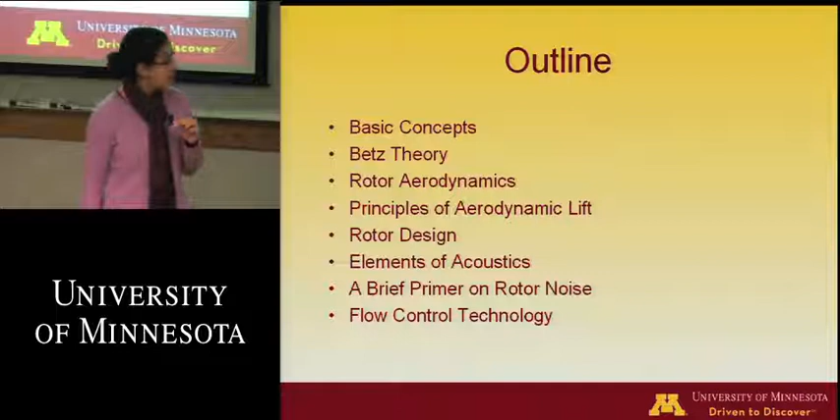Today we have with us Professor Arndt. He started his career in industry, first in rocket propulsion and then in the high-speed marine vehicle field. Since 1967, he's been in academia. Dr. Arndt's major research interests are in fluid mechanics, with emphasis on turbulent shear flows, cavitation, aeroacoustics including jet noise and turbo machinery noise, alternate energy with an emphasis on hydropower and wind energy technology, and aeration technology with a view towards developing cost-effective environmental techniques. He continues his research at the St. Anthony Falls Lab currently, with the University of Minnesota, where he's working on wind-turbine aerodynamics and supercavitation. He's a life fellow of ASME, fellow of the American Physical Society, and associate fellow of AIAA. So we welcome Professor Arndt.

Thank you. Oh, okay. I guess I got to use this thing, huh?

Okay, well, happy to see some people come here on this crummy afternoon.

First thing I'd like to ask is, do you have a background? Does anybody have a background in fluid mechanics? Okay, so with that in mind, I'll try to go easy on you.

What I want to do today is just kind of give you a feel for wind turbine technology and talk a little bit about basic concepts. We'll talk about some very early theory, which started in 1919. We'll talk about rotor aerodynamics, and since you don't have a background in fluid mechanics, we'll try to lead you through it as painlessly as possible. We'll talk about rotor design — obviously in 2 hours you're not going to become rotor designers, but just to give you a flavor for what's involved. And we'll talk a little bit about acoustics and rotor noise, and then a little bit about flow control technology.

So with that, we'll start with the first slide. Is this going in and out? Can you hear me okay?

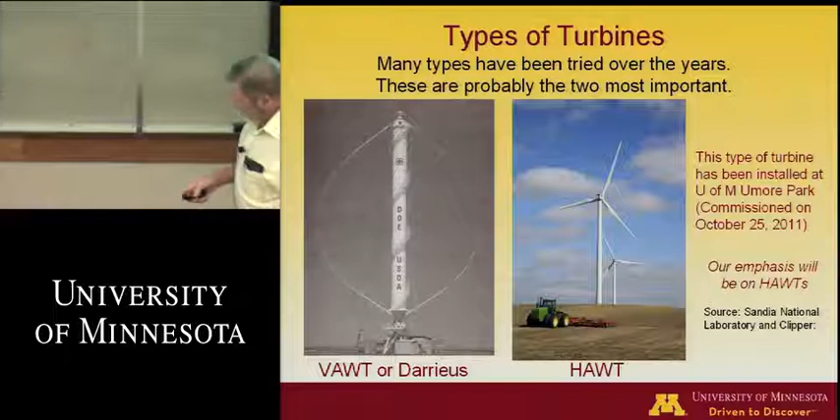First thing I want to point out is there are actually two types of turbines, the vertical axis turbine and the horizontal axis turbine. Our emphasis is going to be on the horizontal wind turbines.

I don't know if you read in the paper, there was a gentleman with a house on Lake Minnetonka, a very high-buck area, who decided to erect one of these. There's a huge stink in court about that. But I point that out because these vertical axis units show a lot of benefit for being in closed areas — they could be put on top of an apartment building and so forth. The horizontal axis units are more prone towards large utilities, and so they're very expensive.

For example, you visited the one at UMore Park, and the cost of that was somewhere between $5 and $6 million. So when we got the DOE grant, the good news was we got an $8 million grant. The bad news was that $5 to $6 million of that was going to go to build the turbine, so there was only $2 to $3 million left for doing research.

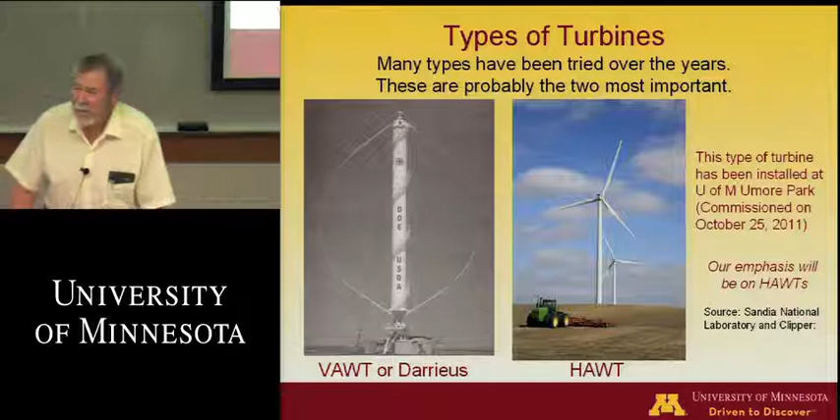So let's look at what we can expect out of a wind turbine. The first thing we want to look at is the power per unit area. This is simply one-half times the density times the velocity cubed — that's the power per unit area that the wind has. Now if we multiply that power per unit area by the swept area of the rotor, pi r squared, that ought to give us the kind of power we could expect.

So we'll define a coefficient of power, which is simply the power we get out, normalized with respect to this expectation. Okay, who wants to take a guess at how much we really can get? How many people say better than 90%? How many people say better than 80%?

70%? 60%? Boy, you guys are pessimists. Okay, let's look at what we can really achieve.

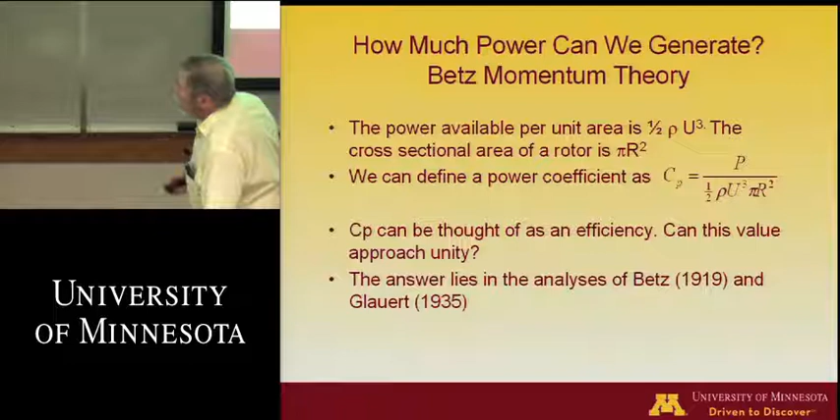It turns out that the low number we're going to see isn't because of any defect in the blades and so forth, but it's just the way the wind turbine operates. As I said, the answer to these questions was first developed by Betz in 1919, and then a person named Glauert improved that result.

The first thing we can look at is calculating the thrust on that rotor. We have an upstream pressure P1 and a downstream pressure P2, and we multiply that difference in pressure by a cross-sectional area, which in this case is that pi r squared. We get a simple equation: the thrust is equal to the product of density, cross-sectional area, the velocity v here, and the difference between the velocity upstream and the velocity downstream.

Okay, so that gives us one equation, but we have some unknowns because we don't know what v and u2 are. So what we'll do is write a Bernoulli equation.

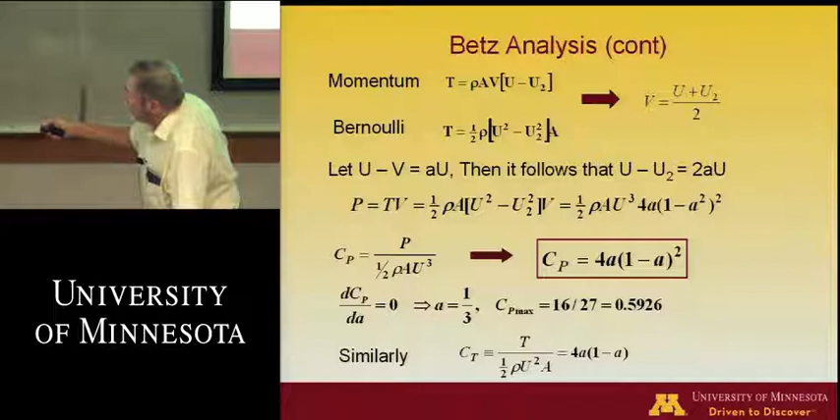We'll use this later, but we can also calculate the thrust coefficient simply as the thrust divided by 1/2 rho U squared times A, which equals 4A times 1 minus A. We'll use that formula a bit later.

Let's just use linear momentum. On that basis, he calculated that the maximum possible power coefficient would be a little under 6/10. But it took quite a while—1919 to 1935.

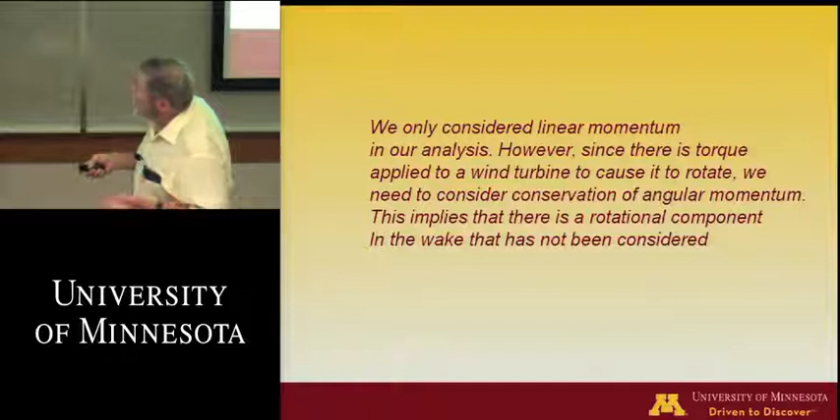So 16 years later, Glauert came along and said you still have another tool in your toolkit: you can conserve linear momentum, but since this thing is turning and there's a torque involved, you can also use conservation of angular momentum. This gives us another equation. It implies that if a rotor is turning, there has to be an equal and opposite rotational component to conserve angular momentum, as shown here.

Glauert used that piece of information—I won't go into the gory details—but what he found was that the upper limit Betz had calculated needs to be modified. We only get that maximum Betz limit when the tip speed ratio is quite large. When the tip speed ratio is low, you don't even get the 6/10.

Now this tip speed ratio is pretty important. If you were a designer wanting a lot of bang for your buck, what would you do with tip speed ratio in your design? Make it high. There are limitations on how high, but let's take a simple example.

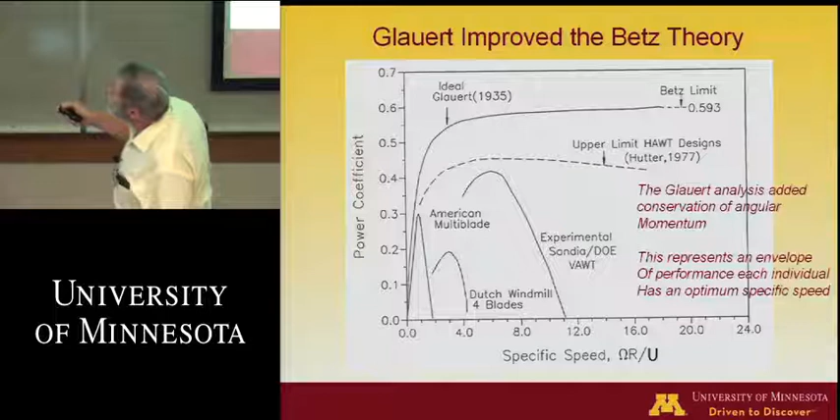So, how should we get that energy out of the wind? Should we just use drag? If you blow on something, you can make it move. Or should we use lift?

And we have the wind relative to the paddle is equal to the velocity u minus the tip speed, which is omega r. So the paddle is trying to move away from the wind, and so the velocity that the paddle is actually seeing is the wind velocity minus omega r. Is that clear to everybody?

Okay, so now what we want to do is calculate the drag. And the drag is 1/2 times coefficient of drag times rho times the relative velocity squared times the cross-sectional area of the paddle. And if we want to calculate the power, all you got to do is take the drag times the tip speed, omega r, and that'll be the amount of power that's coming out.

And so if we go through the motions here, you can see that we get 1/2 c sub d rho a. The relative velocity is u minus omega r squared. Then you have to multiply by omega r again, divide through by u cubed to get it in this form. And you can see now that also what's coming up is this tip speed ratio.

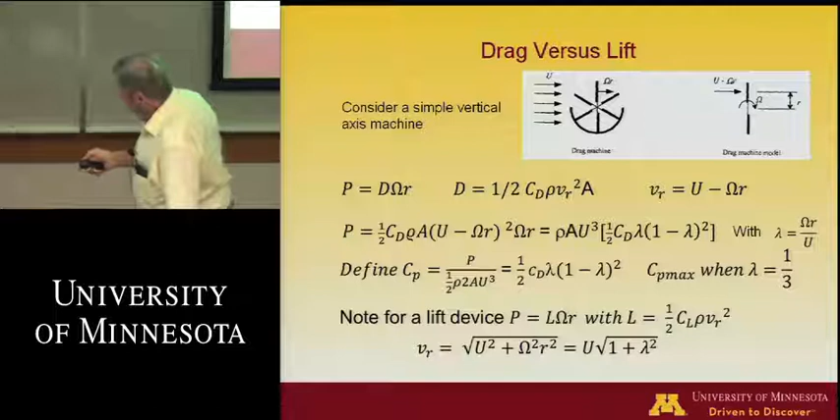So is there any sailors here? Anybody sailed a boat or sailed an ice boat? Or you've all been too busy studying, huh?

But if you look at an ice boat, for example, you can go out. Ice boat's a nice example because if you get a nice smooth ice, you got very little friction, and you could go out and get maybe 5-6 times the speed of the wind. And you say, well, how the heck can you do that? And it's very simple here. If you look at this,

you have a relative wind here. In this case, for the wind turbine, the wind turbine is rotating with a velocity, and that velocity is omega r, which is tip speed. So relative to the blade, we have a component omega r, and then coming in normal to the rotor is the velocity 1 minus a times u.

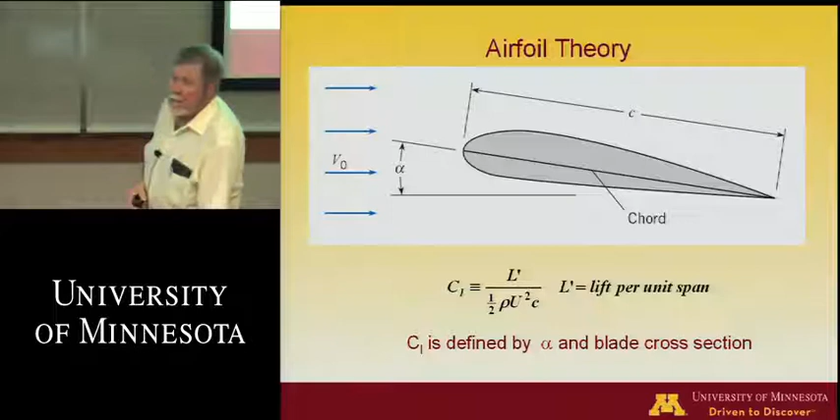Any pilots here? No pilots as well - usually you get one or two. Okay, well if you stall your airplane, you can feel it right away. You can just be pulling up on the elevator, and it's going slower and slower, and then finally it stalls, and it's just like being in an elevator - it just goes down. Then what you've got to do to recover is push on the elevator and hit the throttle, but that's something else.

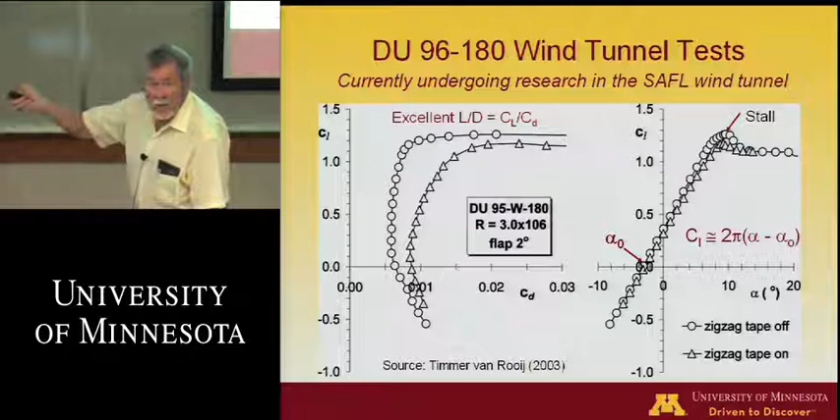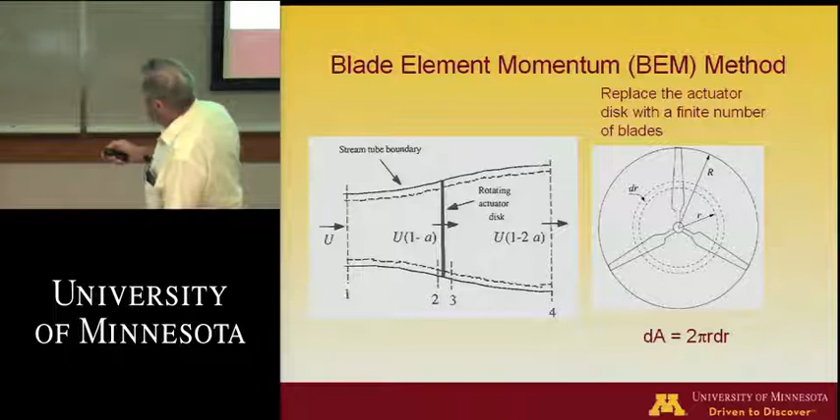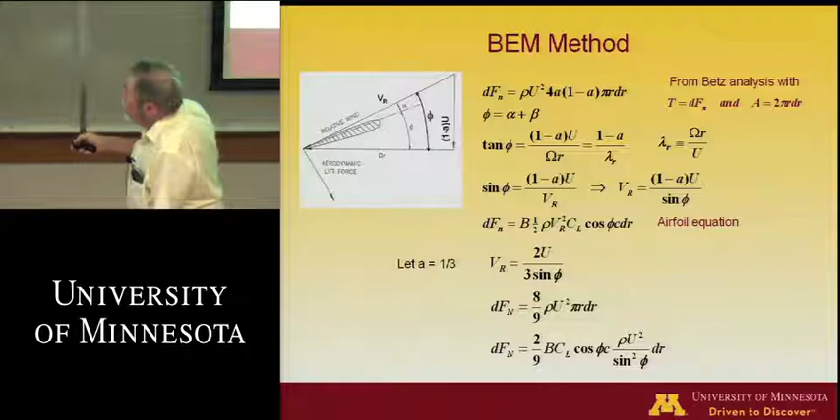So that gives us another equation, the airfoil equation. We have a Betz equation and an airfoil equation. We figured out before that A equal to 1/3 gives us good efficiency, so we'll put that in, and we end up with an equation that looks complicated but really isn't. It's given by this angle, sine phi, cosine phi, lift coefficient, and B is the number of blades, so it's really quite simple.

Now we can simplify here and get this simple equation. Keep in mind that the tan of that angle phi is just given by 2/3 divided by that local tip speed ratio, and we can calculate that phi is just the angle of this. We substitute that in and just get this simple equation.

So we have this equation which gives us the chord length, and we can see that lambda r is equal to the tip speed ratio divided by... I got this wrong here. Okay, r over capital R, that's where it should be. From over here at this angle it looked like R prime or something, but it's just r over R. In other words, you have a tip speed ratio given by omega capital R over u, and what you want is a localized value, simply omega little r over u, so this value is just equal to the tip speed ratio divided by that.

So you can see here that if you're going to be a designer, you could start to play around with different tip speed ratios and so forth to see what you get. You're going to have a homework problem doing this, so we'll show you how to make this calculation as a homework problem so you can see those equations are very simple.

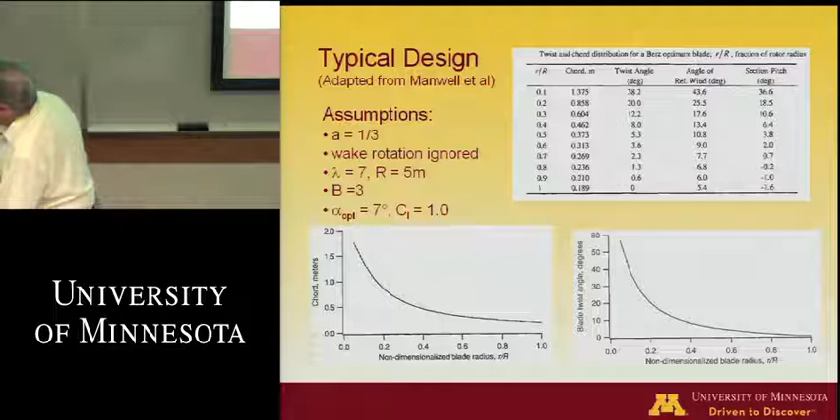You can use those equations, get yourself a little chart, make those calculations, and then calculate the chord here in terms of normalized radius. At the tip of the rotor, that value is 1, and at the hub, it's equal to 0. You can see that the chord length of the foil is relatively small, and it gets wider as you go down.

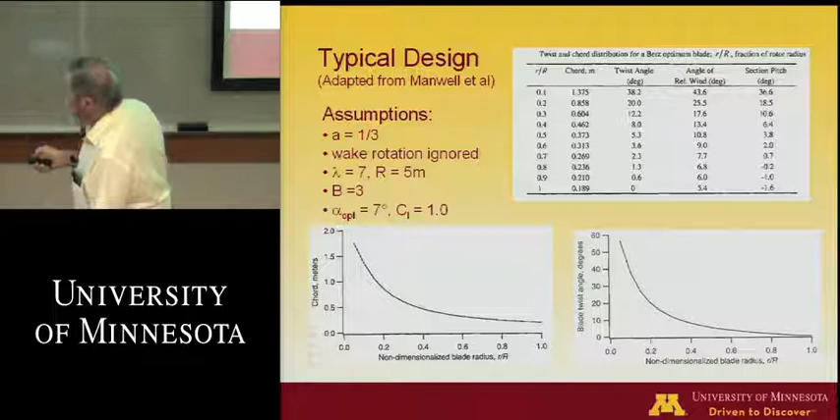So when you look at the blades, you can see that they have a tapered shape, so that at the top you've got a relatively small chord, and getting to the hub, it's a much larger chord. Also, from that calculation, you can calculate what the twist of that blade will have to be, and that's plotted there. You'll have a homework problem that shows you how to do that.

Now, we'll go back to Glauert, and we'll consider the conservation of angular momentum. I'm not going to belabor this point because it gets complicated, but the basic thing is that the torque on the rotor is given by the mass flow times the angular momentum per unit mass. This is the flux of angular momentum, which we write here.

Now you can see that we get one additional term here. We have the A that we dealt with before, but we have another term here called A prime. A prime is nothing more than an equation for this V theta. We say that V theta is equal to 2 A prime times omega r. So you've got that other little parameter there, A prime.

As before, the velocity going through the rotor plane is 1 minus A times the upstream velocity. So we can write this all out and get this equation. We'll call this equation 1.

Now, as before, we can calculate the lift on the blade, keeping in mind that the lift on the blade gives a force in the rotor plane that's gotten by multiplying by sine of the angle. Remember, to get the force normal to the plane, we multiply by cosine of that angle phi.

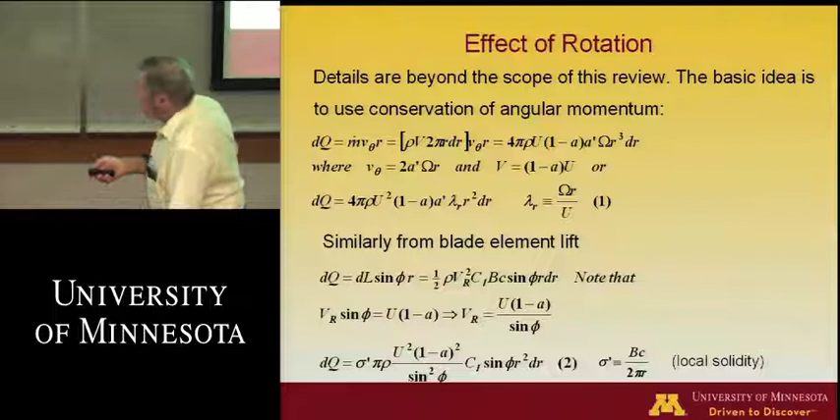And then we have another one that we got from conservation of angular momentum, which is this. So notice what we're doing now: we got an equation for torque from conservation of angular momentum, and we got an equation for torque by just calculating the force on the blade times the radius at that particular point. So now we can take those two equations and manipulate them.

So we can equate that and do this, and we can then go back and use conservation of angular momentum to get another equation. So this equation is conservation of angular momentum, this equation is conservation of momentum, and with some manipulation, we get down to this form here.

Now this looks complicated, because you have to think here that you have these three equations, and what we can do is either numerically solve this set of equations, or plot them. Now I'm going to kind of pull the wool over your eyes and show you what it means to plot it.

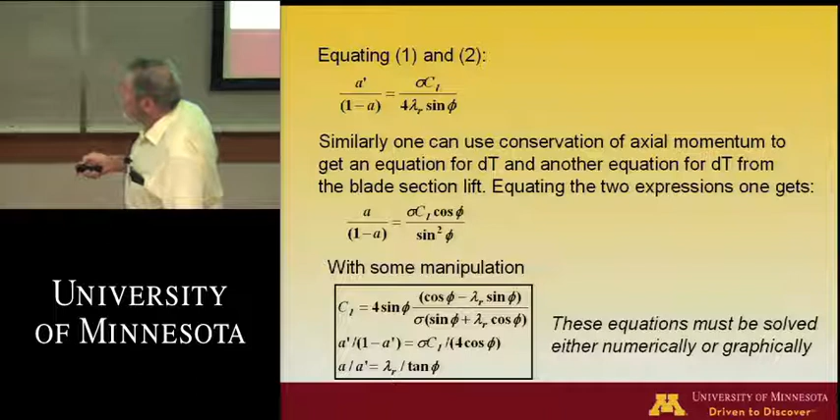Let's take this parameter and see how it would change as a function of angle of attack for different values of phi. We can plot the lift coefficient versus angle of attack, where the twist plus the angle of attack equals phi. So you make a plot of this parameter here, and the relationship between lift coefficient on the blade and angle of attack is given by experimental data.

Now, this is not a one-shot deal. You really have to manipulate a little bit, pick different angles of attack, calculate a phi, and iterate to the solution. So when this equation matches this one, it tells you that for this situation, you should be operating at this angle of attack alpha, and you can see that's well within the range where the foil is useful.

Now, if we look at the results of doing this—I did not give you a homework problem on that one. I only gave you a simple one on balancing linear momentum.

If we look now at this problem, we can talk about solidity. The overall solidity is the number of blades times the planform area of the blades, divided by pi r squared. So if you have a certain number of blades, say 3, and the area of the blades is so much, divide that by pi r squared, that gives you a relative measure. You can look at it this way: if you looked at the rotor, this tells you how much daylight you could see, since you've got the blades and then, where there aren't any, there's daylight. If I put more blades on there, I see less daylight.

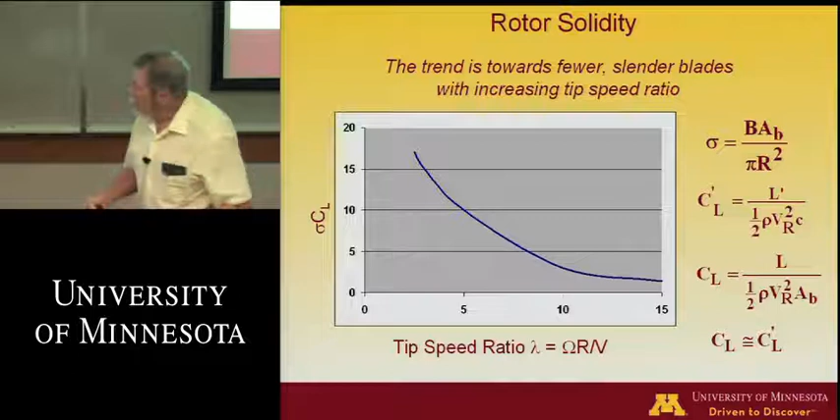Now, another thing that comes into play: how many people have had any structures? Anybody had structures? You remember from Physics 1 what a cantilever was, right?

You remember that if you have a cantilever, it's fixed at one end, and if you push on it over here, it creates a moment. The more this thing is cantilevered, the more moment you have, and the more moment you have, the more stress you have. So in a wind turbine, think about that.

For example, the one down at Umore, that turbine is roughly 100 meters in diameter—actually 98—so it's got a radius of roughly 50 meters, and that's cantilevered at the hub. So you've got all this wind pushing on that turbine, creating quite a force, quite a moment, and you have to accommodate that. The way that's done is by making the blade thicker and thicker as you get closer to the hub, because the little piece out at the tip isn't seeing as much moment as down at the hub, where there's much more moment to accommodate.

If you would look carefully at those blades—it would be much easier to see if you saw a blade laying on the ground—but basically at the hub, the blade is quite thick. In fact, in some turbines they just make it a perfect cylinder down at the bottom. Then as we move up toward the tip, it gets more and more slender. Everybody see that?

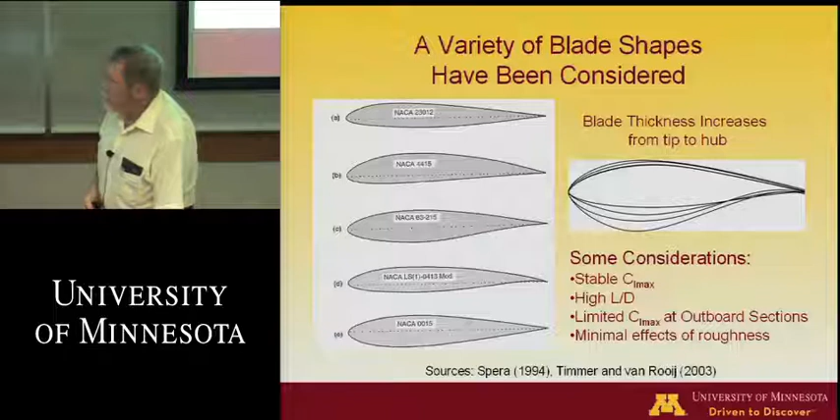Okay, next thing is, can we just go forever? I mean, if a tornado hits, can we just go happily on our way and collect more and more energy?

What do you think? No, obviously there's an upper limit to this, and in the case of most turbines, they have something that looks like this, an important parameter that engineers play with. We plot here the power that this particular turbine generates as a function of wind speed. You get to a certain point where that's the maximum power you've designed for, and you don't want it to produce more power than that. So then you've got two options here.

Nowadays, you use what's called pitch control. How many people have been on an airplane that's a turboprop? Okay, so what happens when it lands? It makes a heck of a racket. Well, why is it making a heck of a racket? The pilot is changing the pitch, putting it into reverse thrust to slow the plane down. So he changes the pitch, and you can hear that right away. What's done here is as the power exceeds a certain value, you simply change the pitch so that

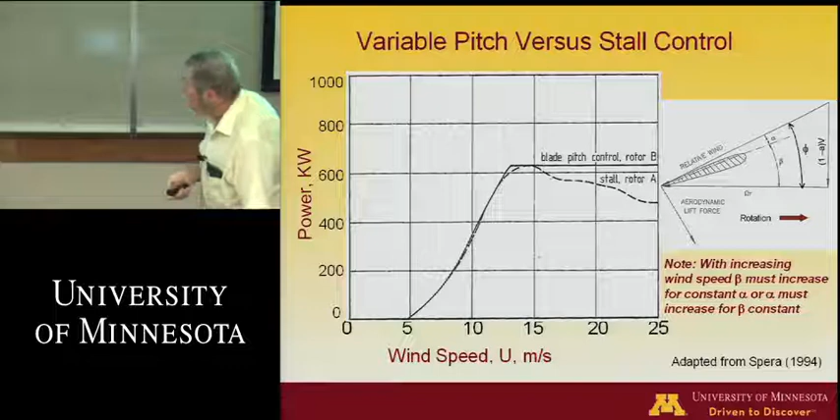Okay, now there's a lot of other little things. I mean, you're certainly not going to be an aerodynamicist after all, as I haven't been an aerodynamicist in 60 years. There's a lot of other interesting facets to this problem, and one is the so-called tip vortex effect.

Here's a model rotor — actually a very large rotor, in a very large wind tunnel at NASA Ames. They made visual the flow at the tip with smoke, and you can see you get this helical motion here. So you basically have a tip vortex, since the blade is rotating and there's flow going in there, it creates a helix. This has an effect on the rotor.

And we'll look at that in a moment. Now you see the same thing on a propeller. The propeller tip vortex is made visual. It was just a humid day, and so humidity came out of solution and made the tip vortex visual, as you can see here.

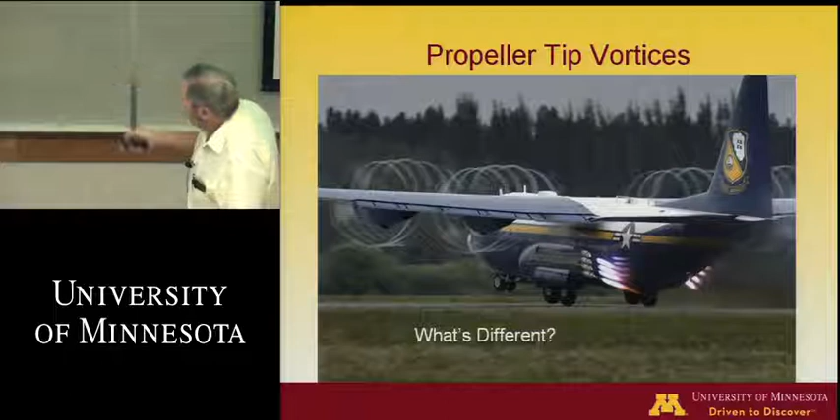Now you would say, what's the difference between the tip vortex illustrated over here? So what we've done is simply taken a slice normal to the rotor plane, and you can see you cut this helical vortex, and you can see the vortex is actually growing in size and thickness as it moves downstream.

But we can also look at a visualization of flow from a propeller. Now the difference here is that the flow is slowing down as it goes through the windmill. So the flow leaving the downstream end of the windmill is slower than upstream, because it's taking power out. Now with a propeller, you're doing just the opposite. What are you doing?

You're putting power in, okay? So when you're putting power in, this means that the flow has to be accelerating.

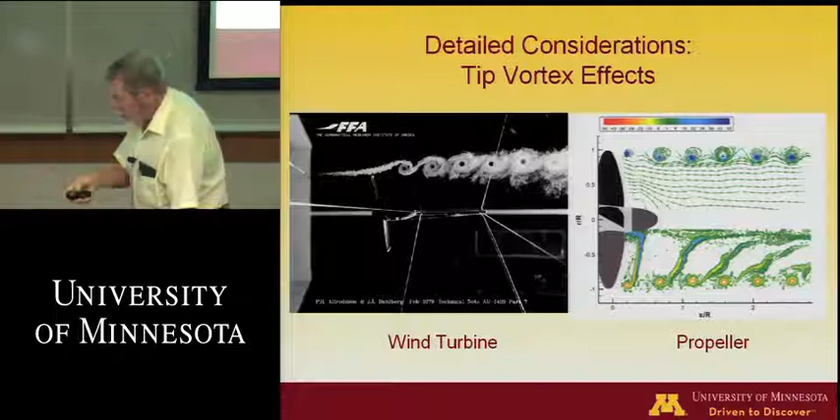In this case, this is made visual by a special technique called particle image velocimetry. You can see the same thing here, the same helical vortex structure visualized by looking at it in a plane normal to the rotor. But you can see there is a subtle difference in the tip vortex structure between the two. One has to keep that in mind in making calculations, and you will not be asked to make any of those calculations. But the tip vortex is an interesting problem.

Incidentally, I was on one flight going into San Diego a year ago, and all of a sudden we were flying along, and there was a huge bang. I mean, like a bang, like somebody just hit the plane with a hammer. And I got the best explanation from a pilot of it being a tip vortex.

What happens is, if you look at a tip vortex, you have a wing here. A wing has higher pressure on the bottom and lower pressure on the top. That's what gives it lift. So the high pressure at the tip swings around, going from the bottom of the tip to the top of the tip, and it creates a vortex motion. That's illustrated here. You can see on this end we have rotation in this direction, and over on the other tip we have rotation in that direction.

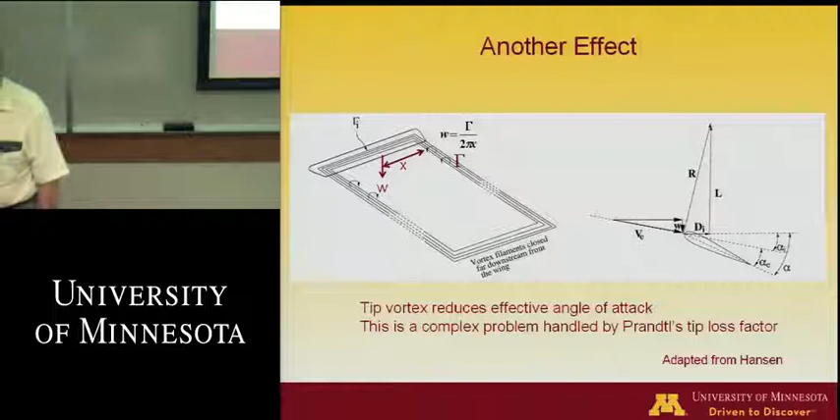Now, how many people have noticed geese? You know, I haven't figured this out yet, but geese seem to be smarter than penguins - no, not penguins, got a mental block there - another kind of bird just flies one behind the other.

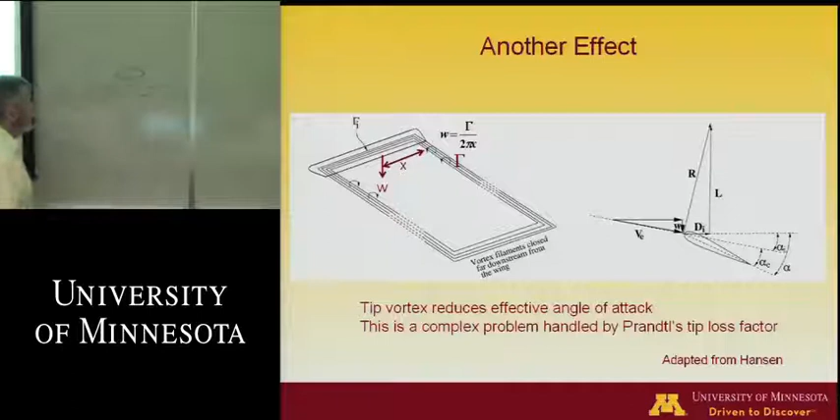What a goose does is this, and if you look carefully, you'll notice they change position. You'll start out with one goose - the goose in front is flying along, creating a tip vortex that looks like that. So the next goose will fly in the upwash of that, and he gets a free ride, so to speak. Then the next goose is out here, getting a free ride from that goose. So you get this V formation, with each goose flying in the tip vortex structure of the one just upstream of him.

So now what would be a stupid place to be? Well, a stupid place would be right behind, because at any particular position along the span, we have a downwash. It's not very bright to fly right behind a goose, but you'd be much smarter to fly off up on the wingtip of the goose, because then you'll get a little bit of help. You can see that illustrated here - you have a downwash anywhere.

Well, this downwash creates a little bit of a problem here. I've sketched that over here. Let's say here is this foil at some angle of attack. Notice here I have a velocity that would look like this, but because of the downwash, this velocity and that velocity add up to get a relative velocity that you can see is at an angle of attack. So the blade is seeing an induced angle of attack, alpha I. It thinks it's going straight and horizontal, but it's not - the relative velocity is at this angle, alpha I.

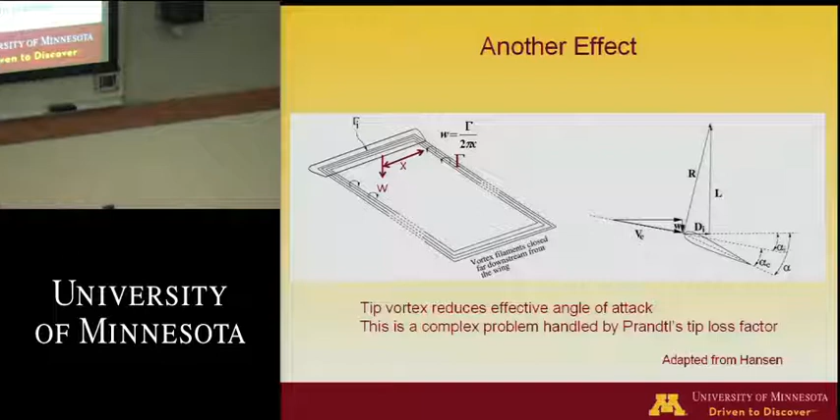That means if I'm holding this blade at an angle alpha here, it really isn't getting the benefit of that angle alpha, because alpha I is subtracting from it. So the blade is actually seeing less of an angle of attack than it thinks it is. And that creates another loss factor in an airplane called induced drag. So that needs to be taken into account.

So to make a long story short - and you're probably saying it was too damn long as it is - if we look at the simple things we're doing here, we've got a lot of things to do, a lot of things to calculate. How many people believe we can just calculate this all? Just take these equations, go home, design the wind turbine, and we'll be okay?

Well, actually, now the answer is you're pretty close, that you could do that, but not perfectly yet. 20 years ago, 30 years ago, you wouldn't even have a ghost of a chance.

The point I'm making is that we need to do some experiments to really pin down what all these complex aerodynamics are.

Did you get to visit St. Anthony Falls? Did you visit the lab? Oh, probably not, because we're under construction, so it's difficult to visit.

Anyway, the lab has a very large wind tunnel. A wind tunnel is nothing more than a way of recirculating the flow around, and we have a test section where we can put model wind turbines and make measurements.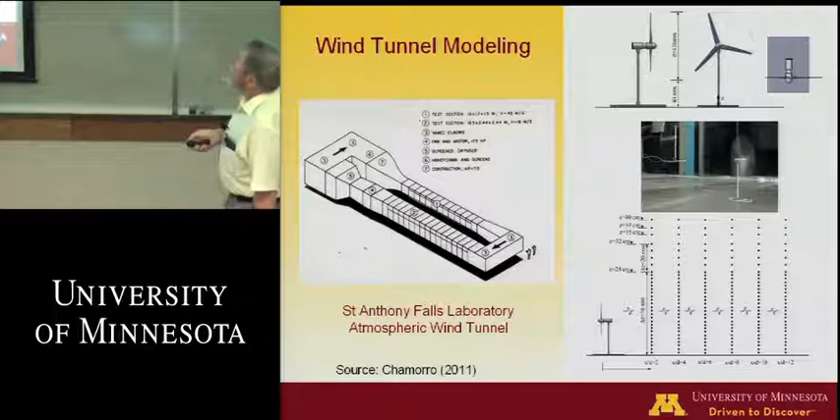One of the things we could look at is the problem we have in the field: the wind at ground level is much lower in speed than the wind way up high. You've driven into campus some days and the wind is relatively low at ground level, but you look up at a building and the flags are waving around like mad. So you've got a huge variation in velocity.

That has a significant impact here, because if I look at the load on that blade, it has a different load at top dead center than at bottom dead center, since the net velocity on the blade is less at the lower level than at the top level.

This creates a dilemma, because the force on each blade varies as the blade moves around—highest force at top dead center and lowest force at bottom dead center.

Now, to study those kinds of things, we can actually create the same velocity variation in the wind tunnel, so we get a situation with high velocity at top dead center and relatively low velocity at bottom dead center.

That's illustrated here. If you look just at turbulence intensity, because of the higher wind speed, the turbulence is much, much higher on the top than it is on the bottom.

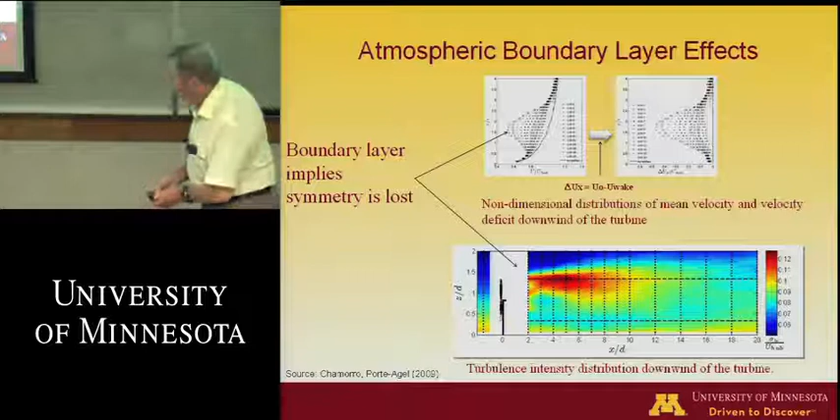Another point here, I think you all realize we just talked about the goose—well, you have a similar problem with wind turbines. The one you saw at UMore is only one turbine.

But typically you have a wind farm, a large number of turbines that are positioned, and the question is what's the best way to position them?

This is illustrated here: if I look at two cases, let's say I stagger these. You can see just looking at the colors, there's not that big an impact on each one—the wake isn't changing that much.

There is some turbulence, but nowhere near what happens if I line them up right behind each other. Then the upstream turbine makes a lot of turbulence, and it smacks right into the next one, and the next one, and the next one. The difference is incredible.

What you can do here is figure out the difference in the total power generated by that wind farm in various alignments.

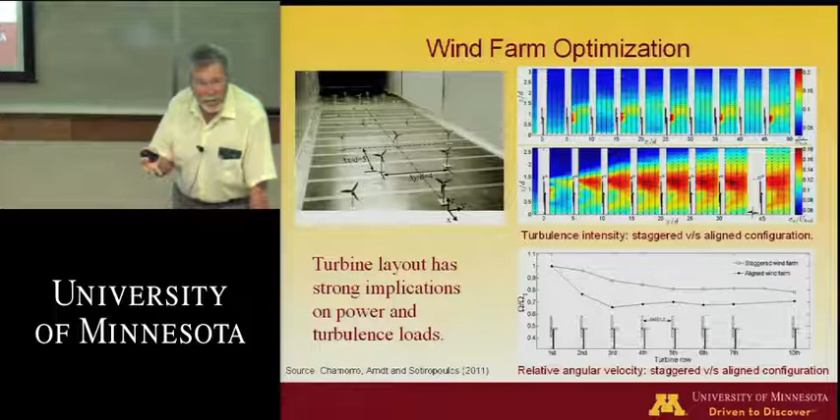You can see with the staggered arrangement, the units further down don't drop off in speed as quickly as they do if they're placed one right behind the other. There are a lot of issues here since the wind isn't always blowing in the same direction, but that's another thing to consider.

So we could actually calculate this. I won't go through the math, but it turns out these units turn at the same tip speed ratio.

Since they're turning at the same tip speed ratio, the difference in power is related to the rotational speed. We can calculate a change in power depending on the ratio of rotational speed from upstream to one of the downstream turbines. And we can calculate that you get 15% less power with them aligned behind each other versus staggering them. That's a huge amount.

Keep in mind that each one of those turbines is $5 million or so, and you might have 30, 40, maybe more. So you've got a huge investment there, and if you're getting 15% less on your investment, that's pretty significant.

So some of the things we've tried at the U in trying to improve conditions is to look at different things we can do to make the turbines run better. One idea is that we know when you have flow over a surface, you have skin friction. So is there some way we can improve that?

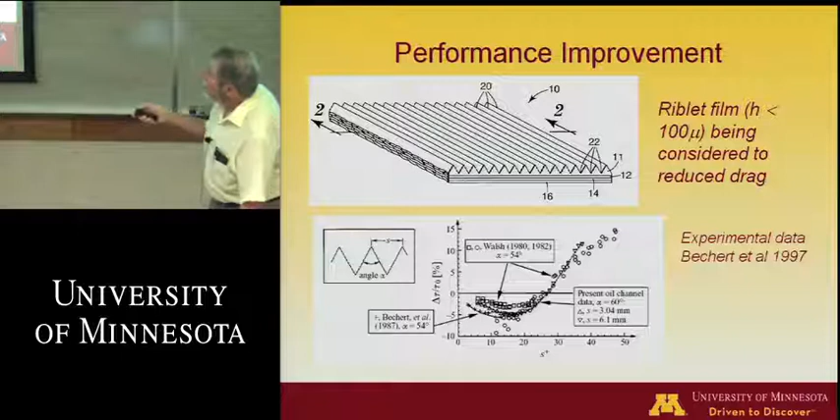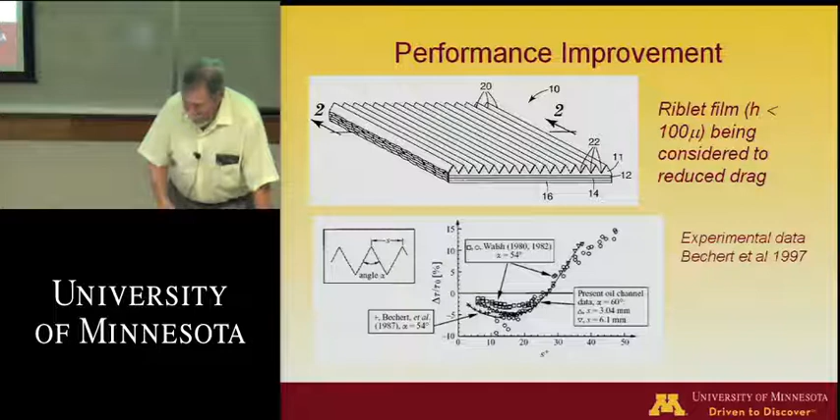So that would mean if you could design and select this to be in that range, it would work. Now the problem is that on a rotor, the skin friction varies over the whole rotor, so you don't know exactly how to do that, so you have to do more research.

So what's done here in our wind tunnel is you can see we have a dummy foil here, and this foil is representative of what the rotors would be at the tip. It's 1 meter in chord length - it's quite a large foil. And we put riblet film on there, and you can see here is the riblet film - that's the riblet film right there.

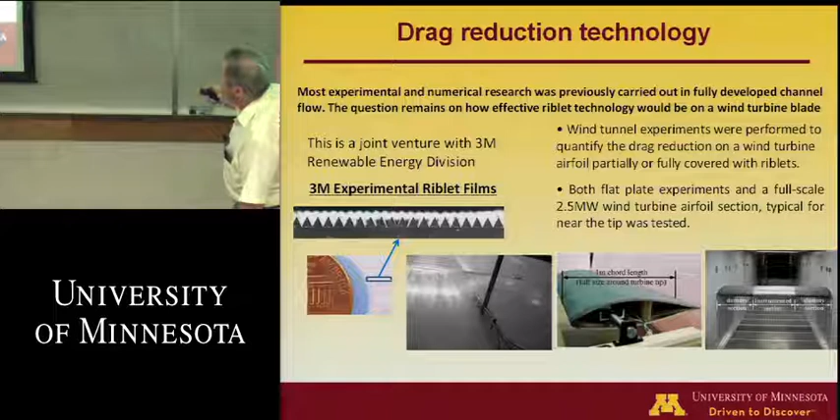And then if you blow it up, you could see the actual serrations, but you'd have to use a high power microscope to see those serrations. We have methods of measuring the skin friction over the whole chord that way, because we don't have the option now of measuring the pressure difference, since the skin friction is varying over the foil.

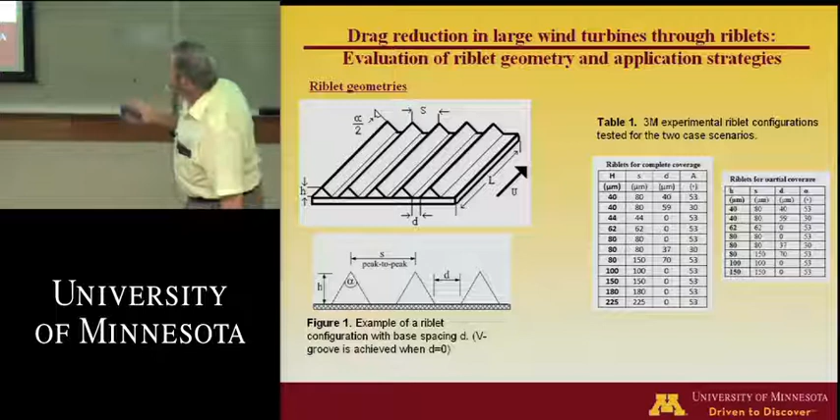So we did a lot of experiments. We used riblets of various geometries, changing the spacing and the height and so forth. We also looked at whether we need to cover the whole foil, or could we get by with only covering a portion of it. So we did some with partial coverage to see what that would do.

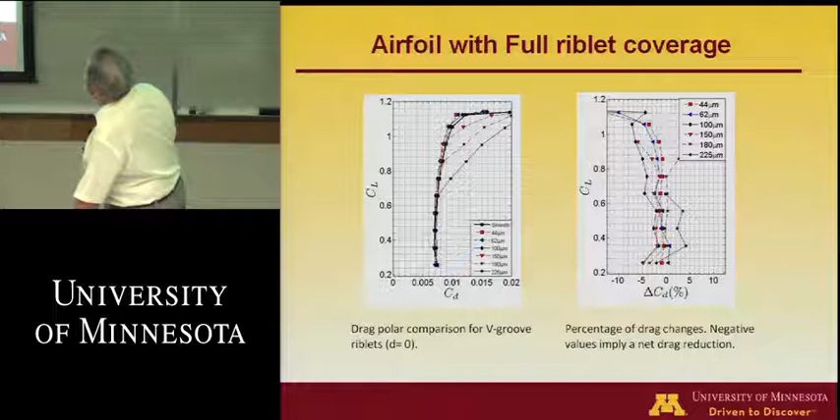So we home in on the optimal, and we found that for this particular case we can make some calculations to see if we take the optimal - back up here a minute - you can see in this particular case it looks like something like the 100 micron is the best value. So we use that 100 micron film.

And what we need to do is calculate where the flow... if you look at flow on anything, the flow initially starts out at the leading edge being laminar - in other words, there's no turbulence in the boundary layer. But as you get to a certain point, it starts to become turbulent. So that means in our particular case, the serrations only work where the boundary layer is turbulent.

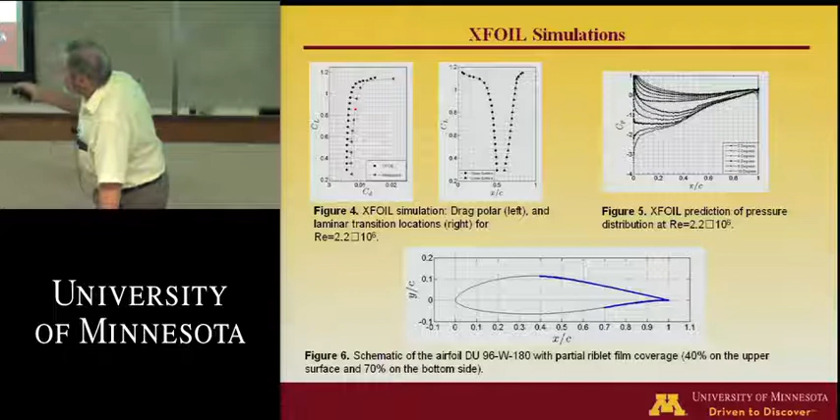So we actually did calculations for different values of lift coefficient to find where the flow transitions to turbulence, for both the upper surface and the lower surface. So what we can do is say, let's only put the riblet film where it's doing work - only where the boundary layer is turbulent. For the upper surface, we start at about 40%, and for the lower surface, we only cover the last 30%. This gives relatively good performance - not perfect, but just doing partial coverage, we do pretty good.

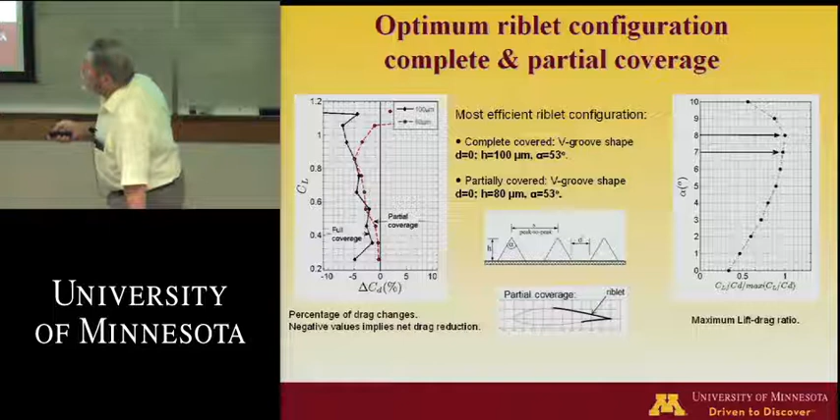This stuff costs a lot of money - it's not cheap, that's why 3M is making it. So if we just use partial coverage, we have a good chance of getting reduced cost and still getting effectiveness. So the last thing to say is, we calculated that and found that for our experiments on the 1 meter foil, the 100 micron riblet film worked the best.

Would it work the best on a 1/4 meter foil or on a 2 meter foil? What's your guess? I think you'd rationalize that it ought to be a different size riblet film depending on the chord length of the foil. So what we need to do is figure out some way of doing that, and the way that's done is we work with a parameter here.

So this gives us a normalized length, and what we want to do now is see how that normalized length will vary. The hard thing here is that we really should be using the actual shear stress, but instead we'll just use the overall drag coefficient.

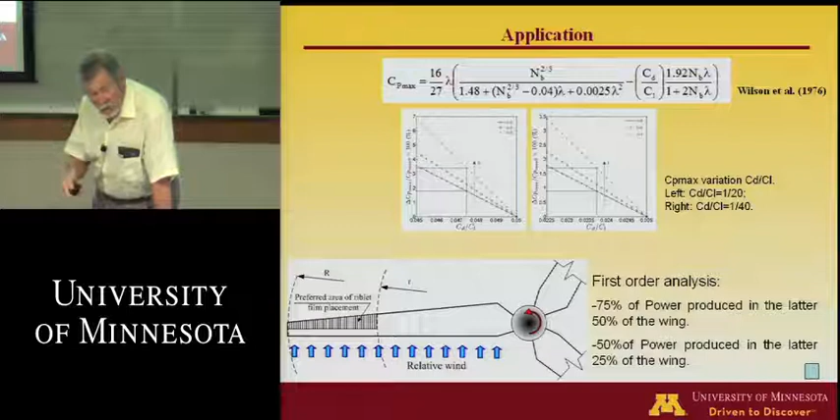So we can also look at other kinds of windmills. Our lab is studying windmills underwater. These are called hydrokinetic devices, and these are devices that extract power from flowing water, just like a wind turbine extracts power from flowing wind.

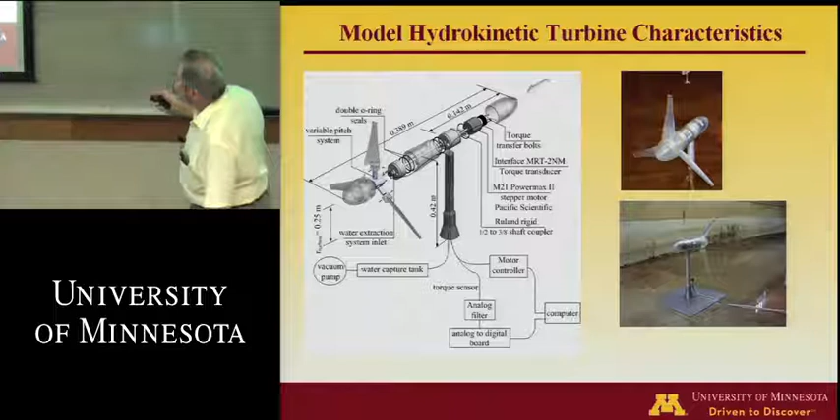And this is a model that's in our flume. We have a flume. This model is designed so that the blades are downstream, and there's a long, complicated story on that, but this operates just like a wind turbine, except it's in water.

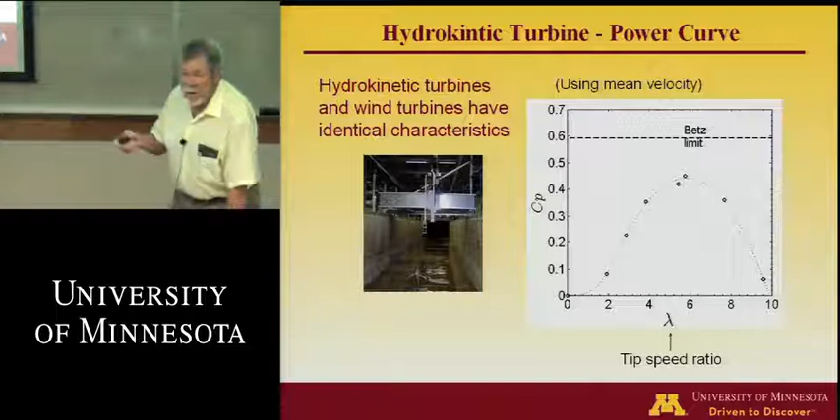If you look at this thing, we can also calculate the power coefficient as a function of tip speed ratio, and you can see that there's an optimal here, and for this one it's around 6. So for this particular geometry, the optimal tip speed ratio is about 6.

So if we look at what we can do in the lab, we can study a lot of problems, but there are certain problems that we need to go to the field for. We know that the atmosphere is pretty iffy. It has all kinds of temperature fluctuations, velocity fluctuations. It's on a much different scale than we can generate in a wind tunnel, and we want to know how much stress is on the structure, etc.

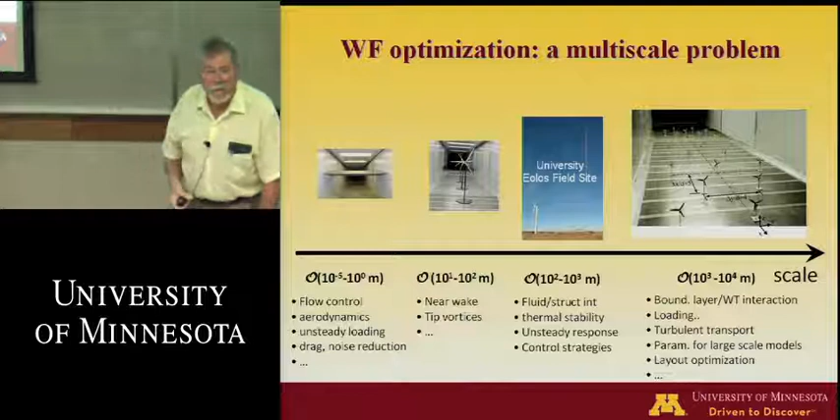For that reason, we call it the Eolos field site, which is the thing you visited down at Umore Park.

So that's illustrated here, and I'm going to just show you one slide. What's neat about this is there's the turbine, and upstream of the turbine we have an instrument tower. So we can measure wind speed and turbulence and temperature fluctuations. A whole bunch of things can be measured, and then we can relate that.

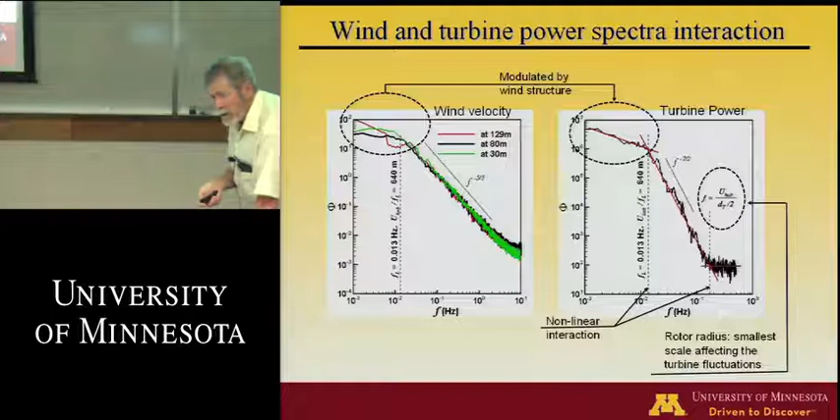I won't go into this one - oh, this one I might as well do very quickly. One of the things they did down at the U turbine is they actually instrumented it to measure the unsteady stresses on there. That seems like a pretty obvious thing to do, but we haven't seen anybody else do it. So you just take the tower and put strain gauges all around the periphery, and those measure strain, which can be calculated to be stress.

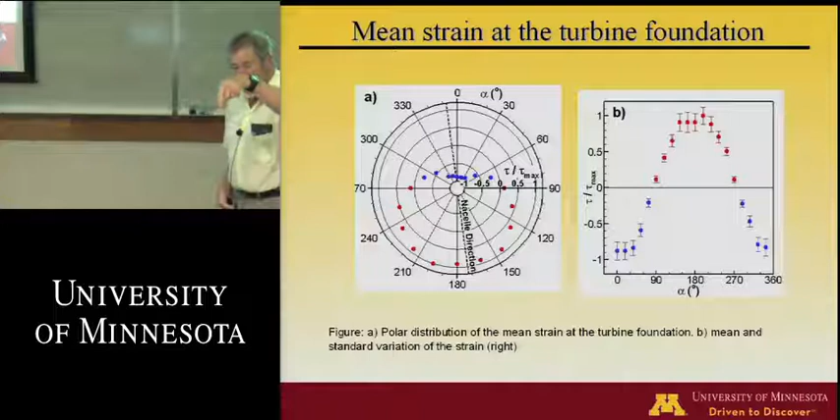You can see here that, remember the maximum wind was pointing - if we pointed the turbine at 180 degrees, that's where we got our maximum wind. And you can see that's where you get the maximum stress if the turbine is oriented in that direction.

Next thing I want to talk a little bit about is acoustics. This is a very complicated topic, so all we're going to do is just touch on it and give you a little bit of a flavor for this.

Wind turbines are becoming more and more bad neighbors, if you want to think of it that way, because as they're getting closer and closer to built-up areas, some of the noise starts to bother them. When they're sitting out in the boondocks in the southwestern part of the state, not bothering anybody, you can't really hear them. But it starts to become a problem now.

Much of what we know about wind turbine noise really comes from helicopter noise, because helicopter noise has been around a long time and there's been a lot of research on it. And of course airplane noise etc. has also been studied to death. So there's a lot of background and primary physics that goes into this. We're only going to talk about a few things, just to give you a little essence of what the problem involves.

One of the things that's really interesting is your ear and what a good device it is. If we look at sound, there's a huge range in power output. For example, the power output of a whisper is about 10 to the minus 9th watts, and a rocket engine produces about 10 to the 7th watts. So there's a factor of 10 to the 16th.

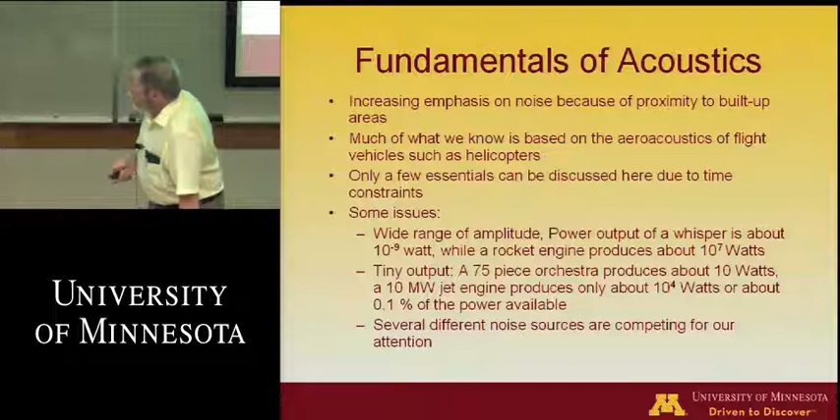And we have all kinds of different sound sources competing for our attention, so that also plays a whole psychoacoustic factor here. So if we look at the simple fundamentals, sound is nothing more than a pressure fluctuation.

If we take the pressure at any instant, at any position x, that sound will vary sinusoidally, like so. Or if we keep time constant, the sound varies sinusoidally with respect to x.

The difference between these two parameters tells you how fast the sound is propagating, and that propagation speed is called the speed of sound. The speed of sound is given by the ratio of specific heats, the gas constant R, and temperature. So as you go up in the atmosphere, the temperature goes down, and the speed of sound goes down.

If we look at the product of frequency and wavelength, that product is the speed of sound. We talk about the velocity fluctuations that are due to this difference in pressure, which is already small, and it's divided by the acoustic impedance, which is the product of density and the speed of sound.

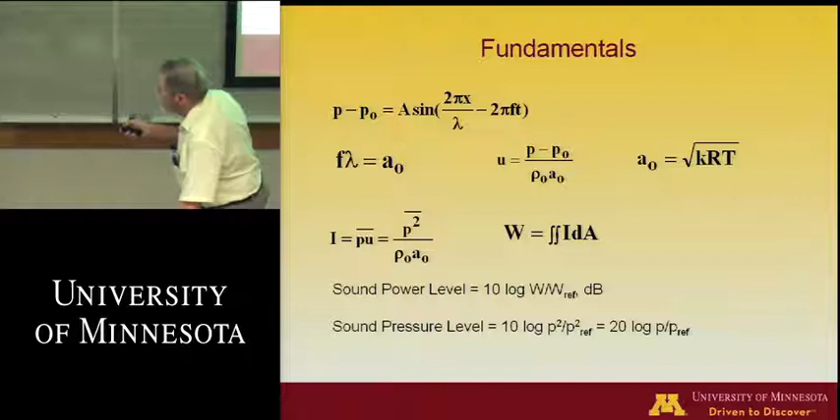And how does that number vary? Well, if you went outside when they were working on the building over there, breaking up some concrete, the sound pressure level for the pneumatic chipper would be up around 140 dB.

A rock group is not far behind, about 120 dB. An auto horn is about the same value. If you go to the subway system in New York, it's a little bit over 100. Conversation is somewhere, depending on the person, around 60 to 70 dB. The sound pressure level in a nice quiet bedroom is typically about 20.

The way this scale works, remember it's a pressure relative to a certain reference pressure, and that reference pressure is picked to be the threshold of hearing. So 0 dB on this scale is theoretically the limit of your hearing ability.

Now that gets complicated because all sounds are not the same, and as you get older your frequency response gets even worse. This is illustrated here: if I take the level that appears to have the same level of noise, for example let's take 40, you notice that the actual sound pressure level that gives me 40 depends on the frequency.

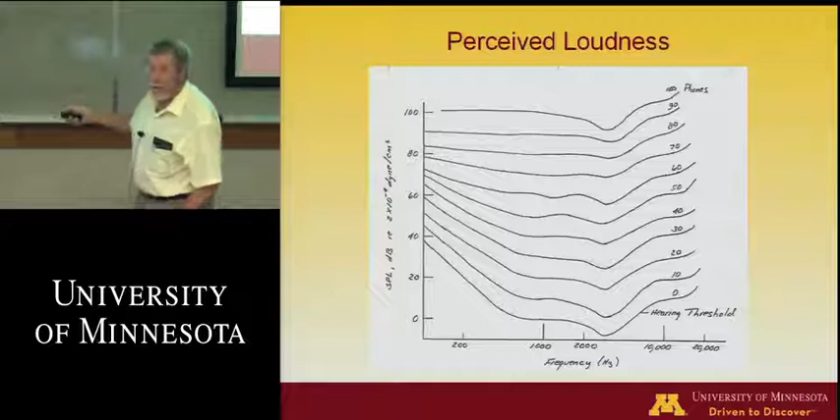Another thing that happens is you're most susceptible right in here, so if you're exposed to a lot of noise for a long period of time, you'll start to get a notch in your hearing right at that point. I was a pilot for something like 44 years, and so I've got a notch in my hearing right around in here, simply from being exposed to all that noise of flying the airplane.

I've illustrated that here just to give you a feel for this. Here we're taking that loudness and converting that to how much loudness you can take over a period of time, and that's these lines here. So you can see that if you had a very loud sound level, like 120 dB, you couldn't be exposed to that sound for more than 1.5 minutes. And as you go down in amplitude, you can be exposed much longer. So the key question mark is here.

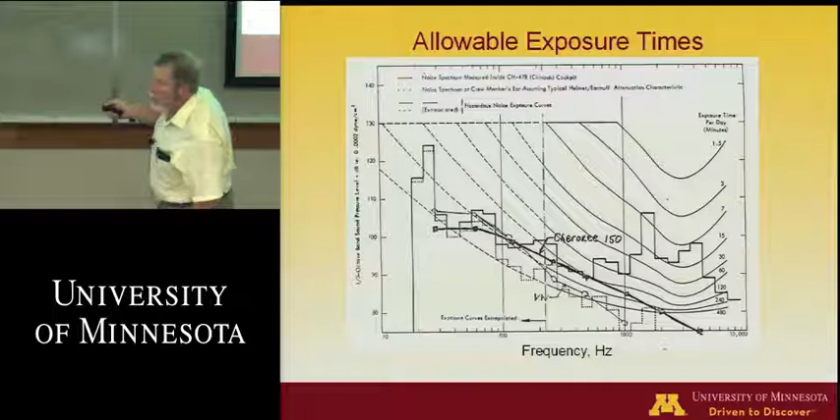I used to drive a Volkswagen, and don't ask me why I drove a Volkswagen for 7 years in this country. It's the old Volkswagen, not the new ones that have a motor with a heating system in it - I drove the old Beetles. I don't know if anybody knows what an old Beetle looks like. Well, I drove one for 7 years when I first moved here, and that was crazy. But you can see that even for a Beetle, you're down to about 4 hours or so that you can be exposed to the noise of a Beetle going along.

Now, this was a little schematic that was in the Trib, Minneapolis Trib 2 years ago, and it shows things in a very nice way here. It gives some idea of the various sources of pollution for these turbines.

One is sound from the moving blades. Another is the fact that you get a flickering, so the blade is casting a shadow. You can imagine if this shadow is going by you, and they're turning at just a couple of hertz at times, it could drive you nuts after a while. Those pulsing sounds - the shadow is pulsing at that very low frequency, and the noise is pulsed at that low frequency too.

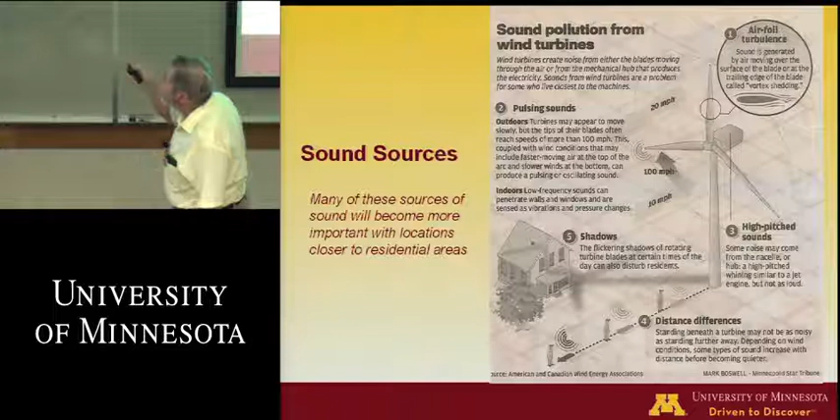So, without going into a lot of detail here, if you calculate the pressure due to a rotor, there are two components to it. One is the fact that there might be unsteady lift - the rotor might be exposed to unsteady lift, like if it's in turbulent flow, it's not at a steady lift but at an unsteady lift. The other is the fact that the rotor is rotating, so you have a component where the rotor is accelerating away from you. You're constantly accelerating, decelerating away from you. So there's two components here.

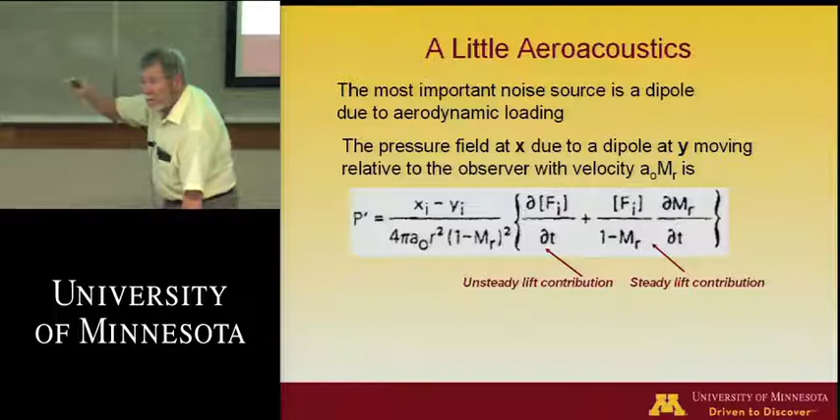One, if you had perfectly steady lift, you still would hear sound because of this component here. So the rotation itself is going to give you sound.

Now, the unsteady lift part can be created a couple of different ways. One way is if the rotor is encountering a disturbance, that gives an unsteady lift, and that would give you noise. Another is that even if the flow is perfectly steady - remember that the flow goes from laminar to turbulent flow, so at the aft end of the blade the flow is turbulent. It turns out that when that turbulence leaves the trailing edge, it creates a sound, and that sound has a directivity pattern that looks like that.

So you've got these various components of sound: the sound created by the rotor passing through turbulence, sound created by the rotor just moving along by itself, and then all kinds of other sounds due to other components of the machine.

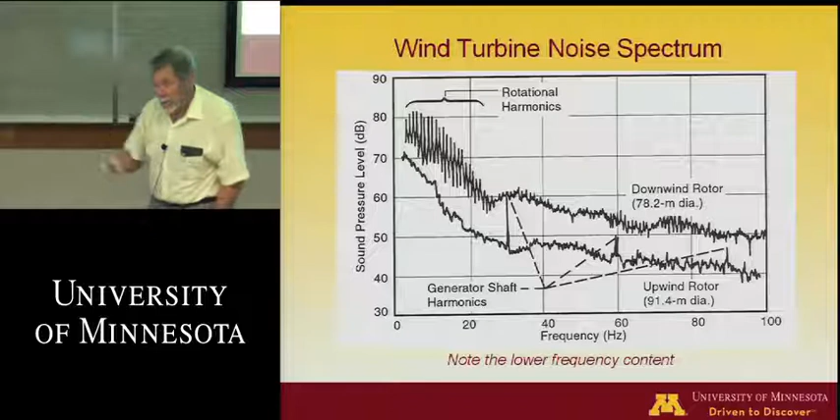Now, the part where the blade is moving along is rather interesting. The reason is that its directivity pattern faces - if you looked at the rotor, the noise propagates to the leading edge of the rotor, not to the trailing edge. So the trailing edge noise propagates forward.

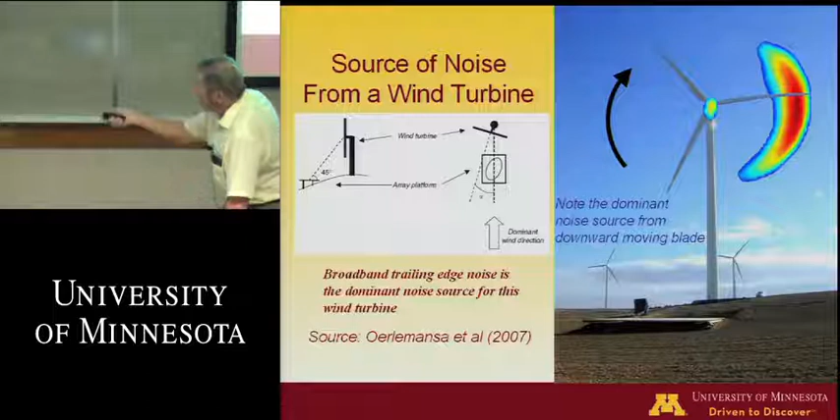So if I compare the two, the spectrum of a helicopter looks very similar to the spectrum of noise from a wind turbine. The key difference is that you can hear the helicopter rotor, but you can't hear the wind turbine's rotor noise. What you can hear is just the turbulence-induced noise of the individual blades. You can see the noise level is quite low. So what's the problem? If you can hardly hear these things, why are we complaining about the noise?

Anybody have any idea?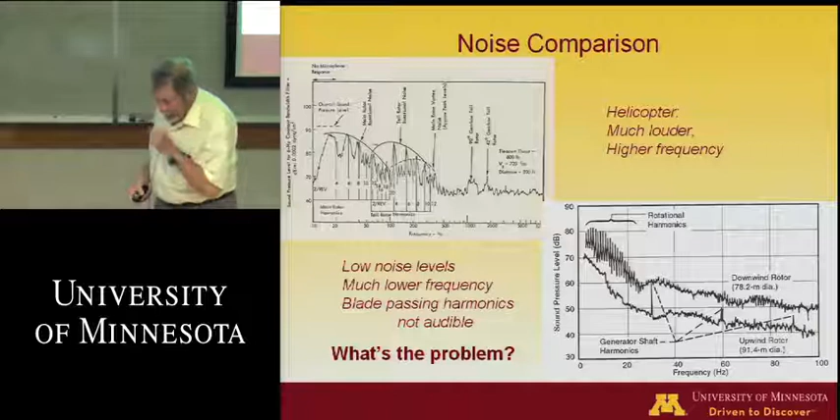How many people have been exposed to a dripping faucet while trying to sleep? If you took a sound level meter and measured the sound of that drip, drip, drip, it's very, very low - probably wouldn't even budge the needle. But you can still hear it. Drip, drip, drip. And that's exactly the problem with these wind turbines - they're not making much noise, but they're going zip, zip, zip, zip, and it just drives people crazy. So there's a psychoacoustic factor here that relates to solving that problem. It turns out there are some things that can be done to control that, and we're working on those now.

So we've got about 10 to 15 minutes left, let's talk a little bit about flow control technology. There are lots of things we can do - we don't have to live with the way the turbine operates. We can actually improve its function to some degree.

One thing we can do is passive control using vortex generators. How many people have noticed on an airliner what looks like a bunch of little blades sitting up on a leading edge? Those are vortex generators, and they improve the flow over the wing. They mix the flow and improve it over the wing. You can use the same thing on wind turbines, mainly to improve flow towards the hub, where the foil gets real thick and the flow doesn't want to stay attached. These vortex generators mix up the flow a bit and help it stay attached.

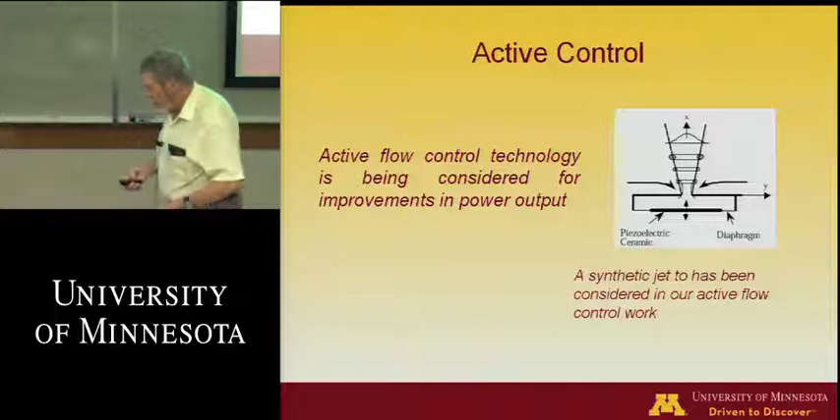In addition, we can do what's called active control - we can sense when the foil is trying to do something nasty, like have a load fluctuation, and manipulate the flow to alleviate that problem. There are lots of different ways to do this. One example uses a little piezoelectric ceramic that creates a fluctuating flow, called a synthetic jet. If you position those at the leading edge of the turbine, you can control the unsteady loads that are trying to be created.

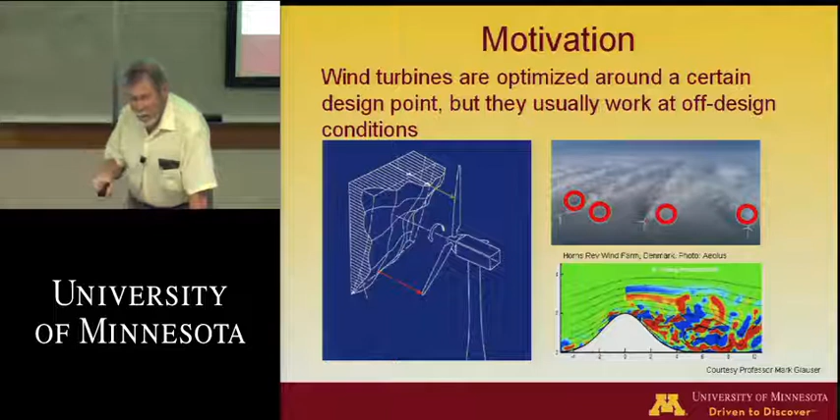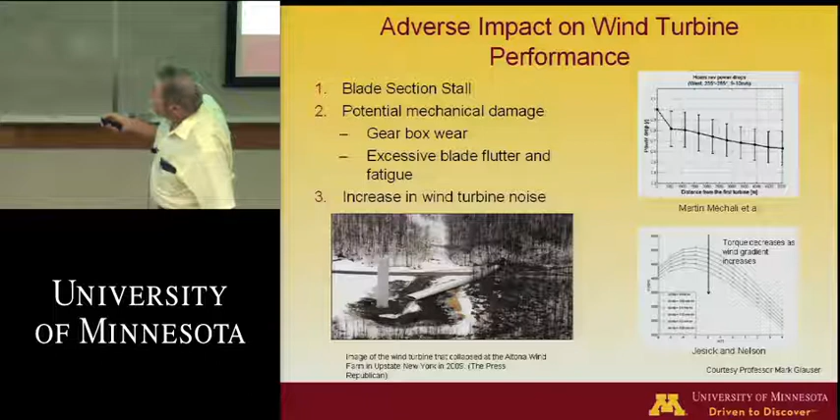Why worry about that? Well, turbines don't operate in nice uniform flow - there are lots of reasons they don't. You can see some examples here: the turbines in the back are not operating in as uniform a flow as the ones up here. You could have a unit behind a hill, etc. So you have components of inlet flow that are spatially and temporally not uniform, and those create unsteady forces. Those unsteady forces can be disastrous - here's a wind turbine that just totally collapsed.

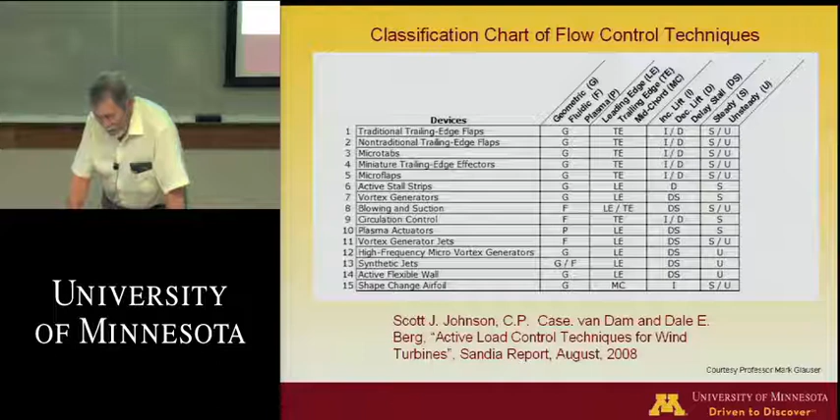So the industry has tried a lot of different things, and they don't expect you to absorb this little table, but there's all kinds of aerodynamic techniques that have been tried. For example, we showed you vortex generators is one. Blowing and suction is one that we've been looking at.

One is a shape change airfoil. The Wright brothers were the first ones to invent that, they would warp the wings. They found that they didn't know how to get the thing to turn, so they actually would warp the wings to create a rolling moment to get it to turn.

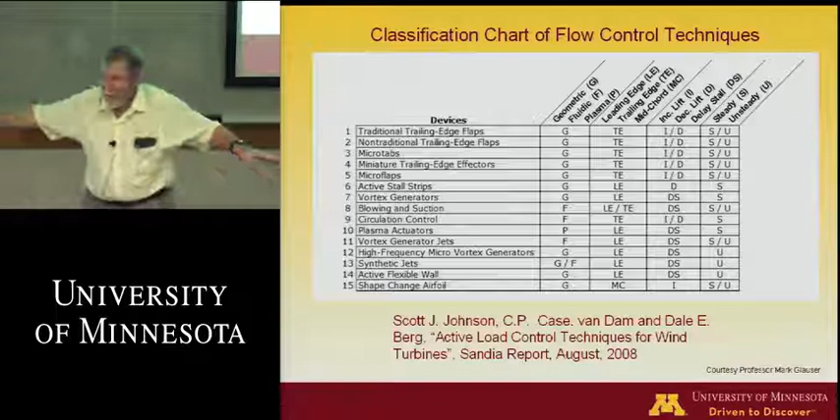And then you can see the synthetic jets mentioned here. There's a whole bunch of other things, but you can see there's a lot of different things that have been tried.

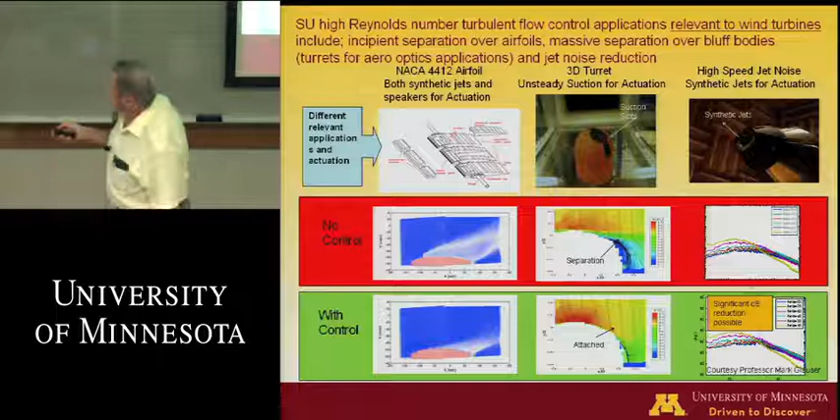Now, we've been working with Syracuse University on this problem, and they have a very wide background in looking at active flow control for lots of different cases. One case is an airfoil of an airplane. Another case is this turret that's on an airplane that collects information, and the flow over it is unsteady, and they use suction to actually improve it.

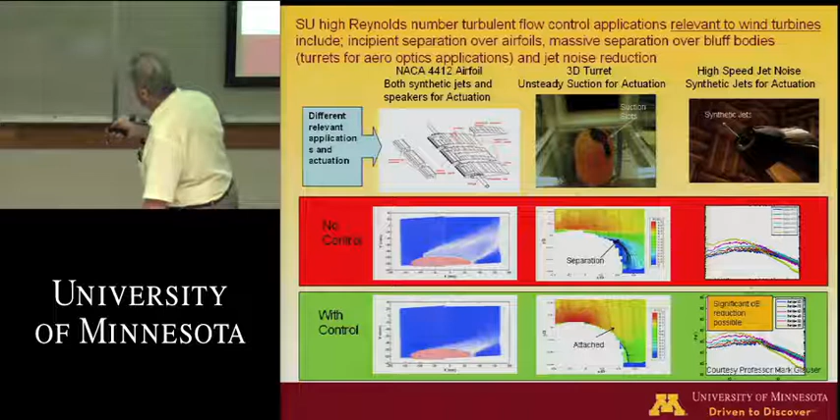You can see here's the flow without the device turned on. Here's the flow with the device turned on. You can see how much smoother it stays. And they've been looking at using synthetic jets, for example, to reduce jet noise.

So in our case, what they did was they've taken our foil, which in our wind tunnel is 1 meter in length, and they don't have a facility that can handle a 1 meter foil. So they have a 1/4 meter foil that is instrumented, with pressure taps.

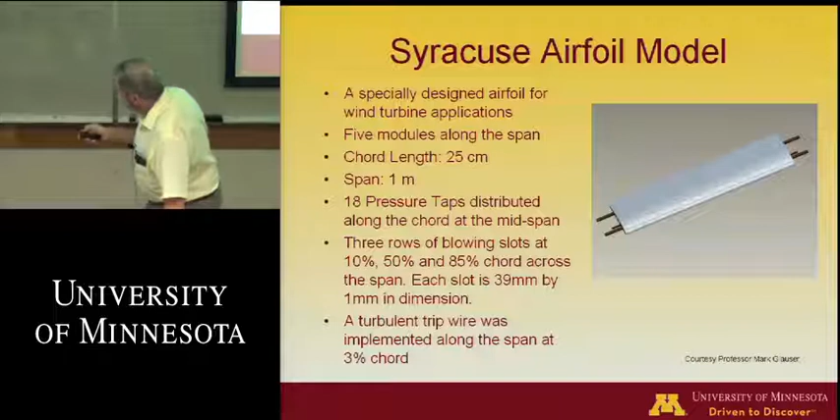It's instrumented at various places where they can blow air in to control the flow at 10, 50, and 85%. In order to, since the foil is relatively small, only a 1/4 meter compared to our 1 meter foil, make it look like a foil operating at higher Reynolds number, they actually tripped the boundary layer right here with a tripwire. So they have this foil, and they have it instrumented.

And what they can do is they can sense unsteady pressure, and when the unsteady pressure is happening, they can blow air in there and control that flow and actually snuff that out, provided they phase it correctly. And of course, there's a control algorithm that has to be used to do that.

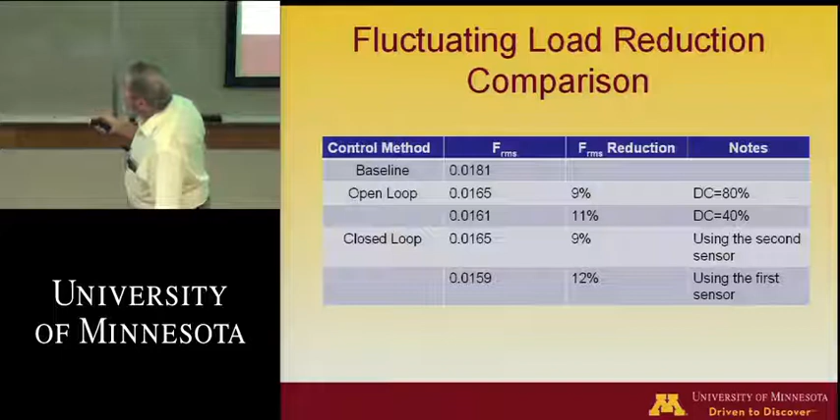But they actually have already gotten some reductions in unsteady lift of the order of 10% already. So that's pretty good, and that's just the very beginning. They haven't really done much more with that at this point, and that's with a relatively small amount of flow to control it through those jets.